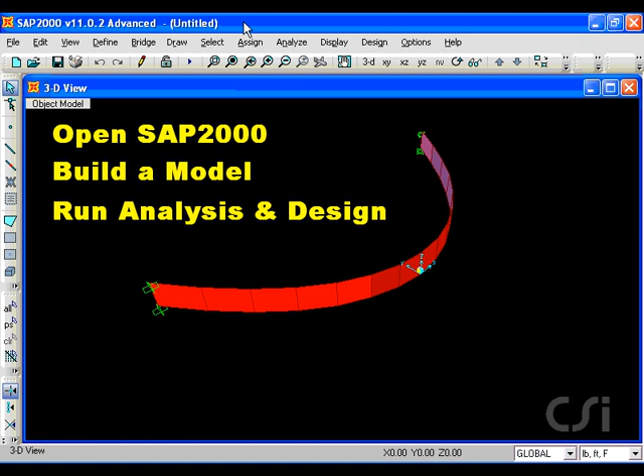This tutorial will show how to use the SAP 2000 Application Programming Interface, or API functions, to start SAP 2000, build a model, and run an analysis from an external application. In this case, we will use Excel in its Visual Basic for Applications language, or VBA, although almost any programming language can be used to access the SAP 2000 API functions. The SAP 2000 API license is available for all versions of the program.

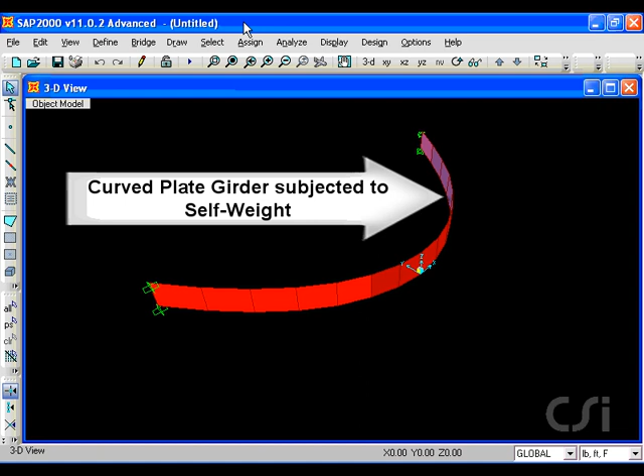Our model for this tutorial will be a curved plate girder with fixed ends subjected to self-weight. Included with the SAP 2000 API license is documentation that describes all of the functions in detail. Chapters include an introduction, getting started, API functions, example code, an alphabetized list. For each function, detailed information on the syntax, the Visual Basic procedure, and the parameters is provided, along with remarks and sample code using VBA.

We will control SAP 2000 from Excel using VBA. We will also define the geometry for the model using Excel. We start by defining a column for the x-coordinates of the girder. Next, we define a column for the y-coordinates. Lastly, we will define a column for the vertical displacements along the bottom of the girder, which will be extracted from the SAP 2000 analysis and written into Excel.

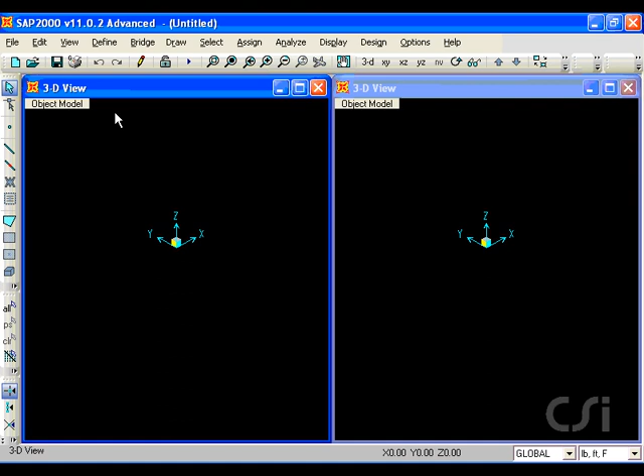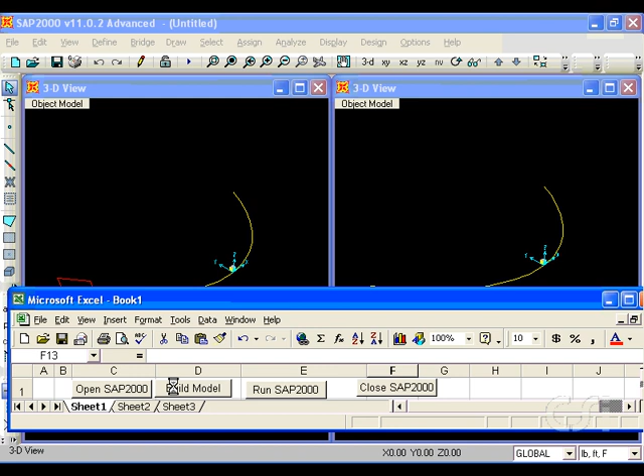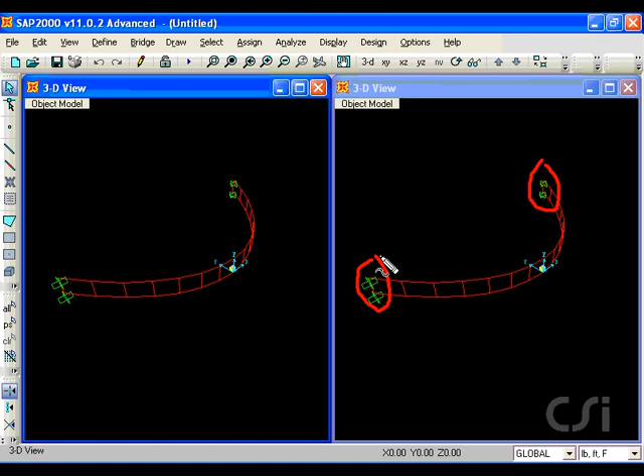With SAP 2000 now running, we return to Excel and click the Build Model button. First, the frame objects are created along the curved geometry and then extruded into the area objects that form the girder. Note that the joint restraints have been added at the ends. Also, the file is still untitled, as it will not be saved until we run the analysis procedure.

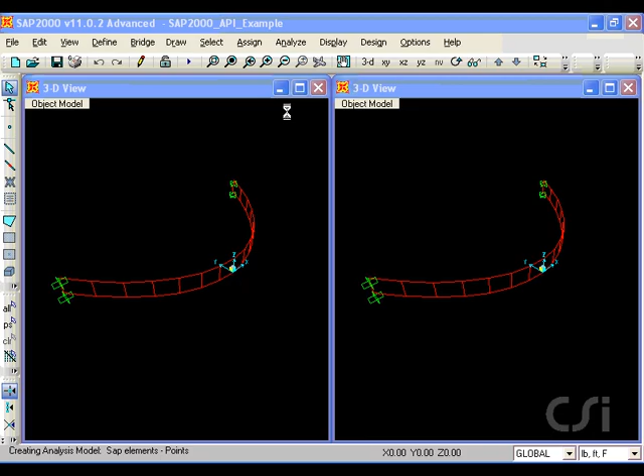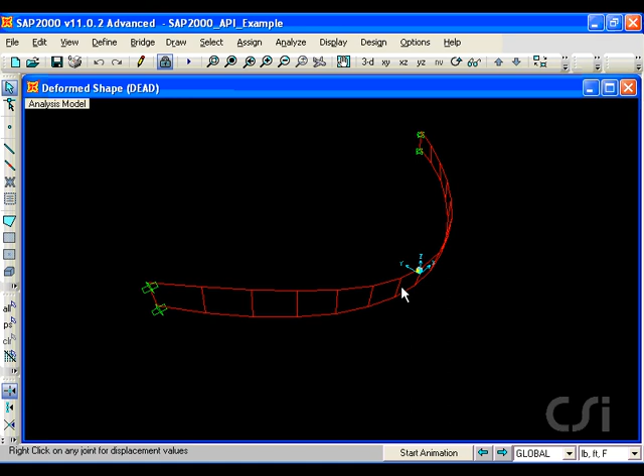We are now ready to run the analysis. Note that the vertical displacement column is blank. These cells will be filled in after the analysis. With the analysis complete, note that the file has now been named and saved. The vertical displacement at the origin is minus 0.1573. Remember this number for comparison on the worksheet. The displacement values are now displayed on the worksheet. The value at the origin matches that shown in SAP 2000.

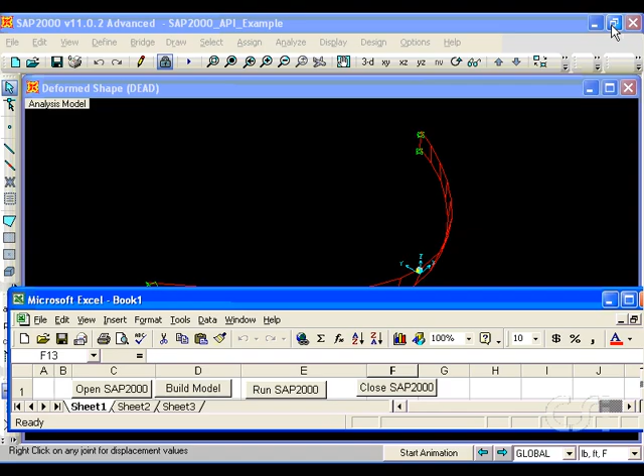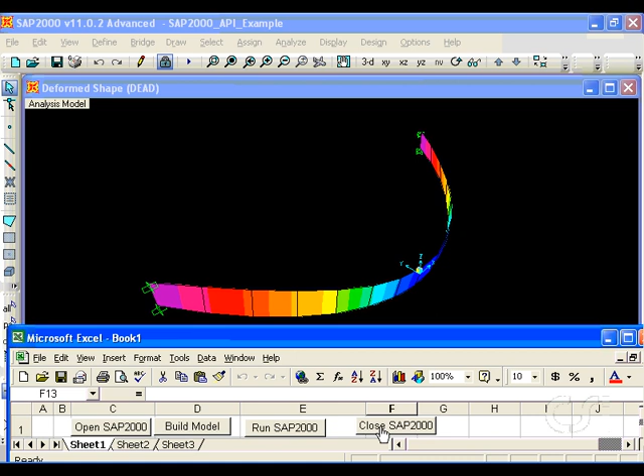Even though SAP 2000 was activated from an external application using the API functions, all the SAP 2000 menu commands are still available, and here we ask for displacement contours to be displayed. With the analysis complete and the desired results extracted back into Excel, the last step is to close the SAP 2000 program.

In summary, SAP 2000's API functions provide a convenient way to link SAP 2000's powerful analysis, design, and graphic capabilities to other applications. Although this example used Excel and its VBA language, most major programming languages can be used to access these API commands. This concludes this tutorial.